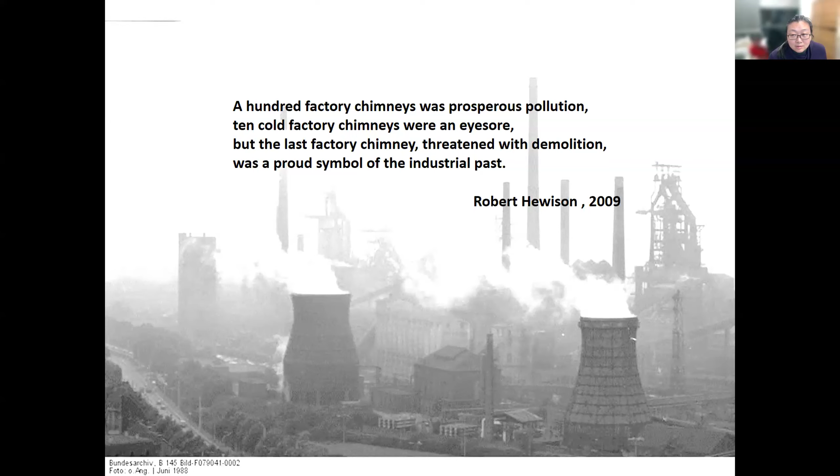And Robert Hewison, his writing gives me a lot of inspiration during my thesis writing. During my thesis, I developed a research discussion about how those unintentioned industrial remains, those not designed for long-term conservation, like monuments and architecture, came to be considered as valuable things, and through which process they were being considered as historical buildings, listed buildings in different cultural contexts.

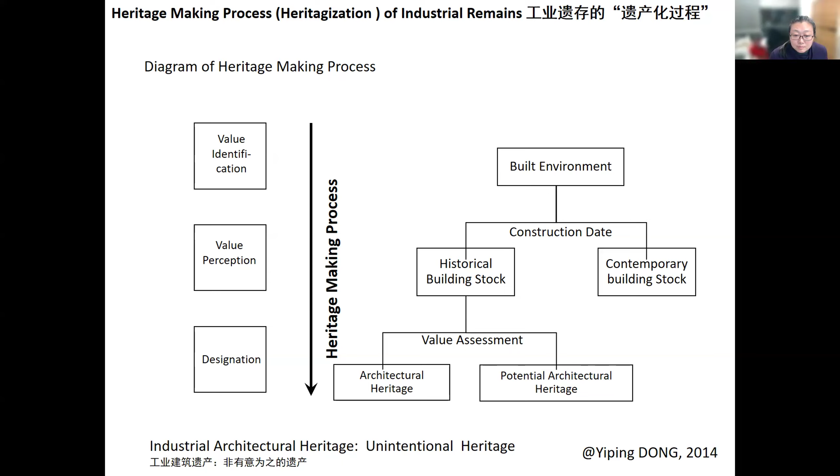So particularly the value perception is very important through a discussion by different bodies, like the architecture society and also engineer society. They all started to make more discussions about those monumental buildings from the 1950s to the contemporary. Those started one process of heritage making in historical buildings like textile mills.

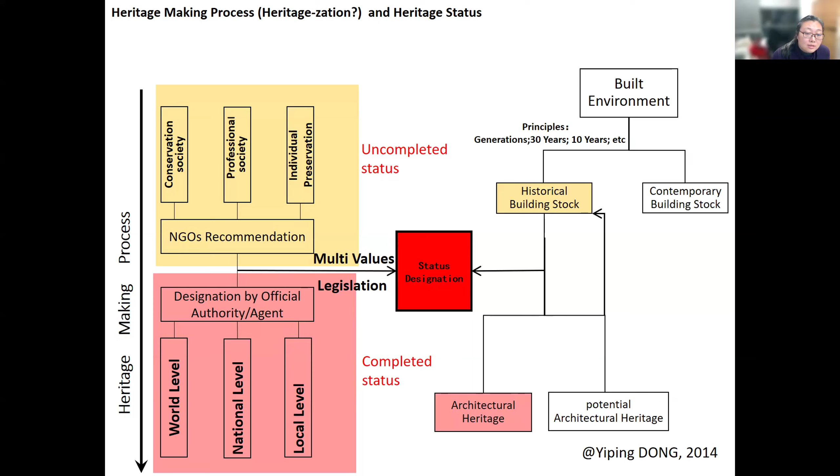So after my thesis, I started to do one particular thematic study on the textile mills, which is also inspired by a very important novel by Elizabeth Gaskell, who describes the North and South, the division and different development in the textile industry, particularly in the North cities in England. I loved this TV adaptation, and I also read the novel, and then I started to think about why the textile industry is so important in the discussion.

And then, I started to be a TICCIH member since 2004, and that also inspired a lot for my research. So I read the thematic study about different industries in the TICCIH document, like the international context for textile sites. I think today Dr. Watson is also here, so I may learn more from this part.

So I think the textile industry has had a long and impactful role for urbanization, particularly in the modern period, for architecture as well.

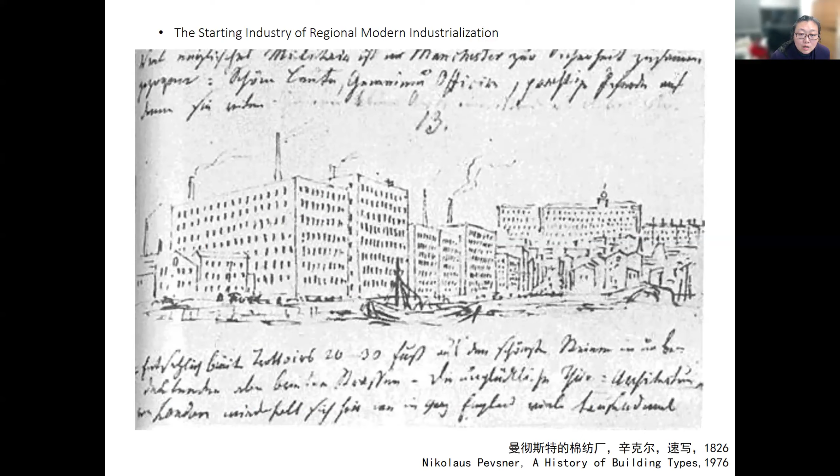Manchester is a great city with a lot of textile mills. And when I had a chance to visit Manchester in 2008, I got to visit those museums and also those big factory buildings in the Greater Manchester region, and learned about the technology development for those different architectural forms and typologies, particularly the technology development related to textile production in the British context.

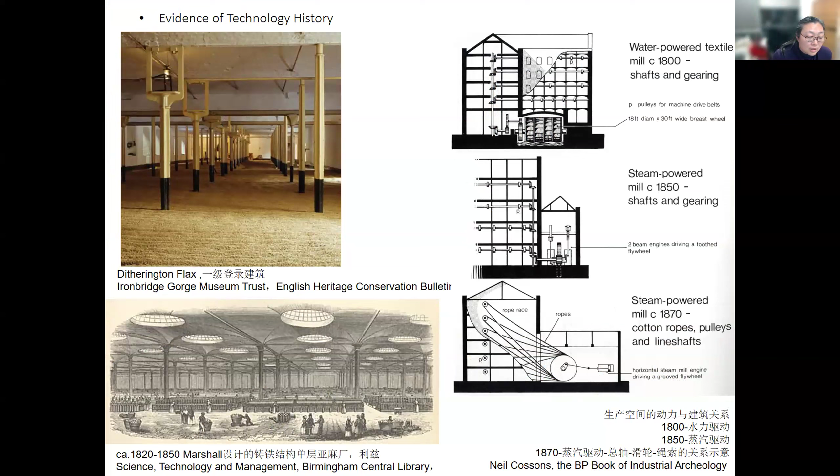And there was another discussion about industrial heritage nomination to the World Heritage Sites. We see in Japan, the first modern silk mill, Tomioka, was listed in 2009 or 2010, I cannot remember exactly. But this discussion also gives a quite interesting topic about how Western technology was introduced into the East Asia context, and how East Asian local craftswork is connected to the introduction of Western technology. This is a technology transfer discussion.

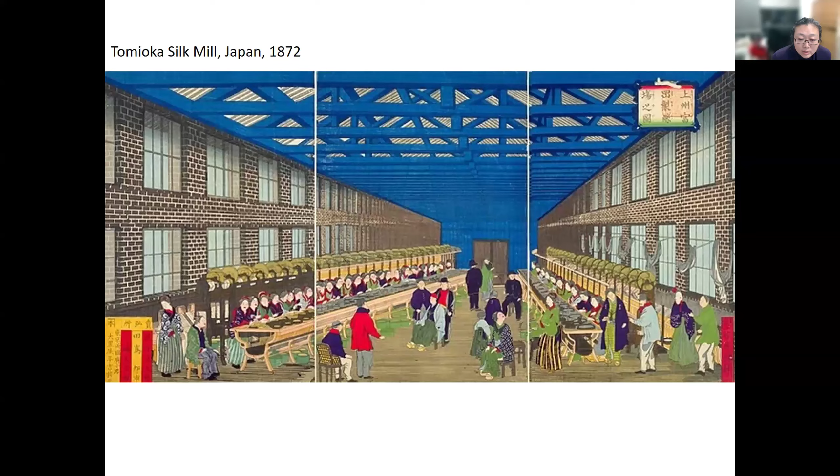So we see French engineers were invited to Japan to develop this cocoon warehouse and also the main manufacturing building in the late 19th century.

So when I came back to my working place, in Suzhou and Shanghai, this is the Yangtze Delta area, I'm thinking about why the textile history here is so long, and how this textile history from handicraft has been transformed into modern manufacturing, very similar to the UK and also similar to the Japanese practice in the past.

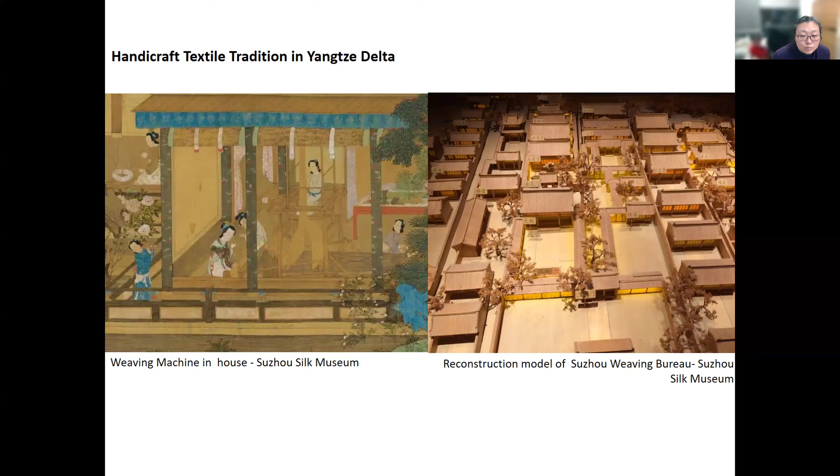However, at the beginning of the First Opium War, and later at the beginning of the 20th century, the whole area started taking up modern manufacturing for those products.

But recently, these places are under reuse, particularly of interest for the interior space, the volumes for creative industry, for office buildings. So I had a discussion of why this building should be used only for those programs. Is this adaptive reuse, or is this adaptive abuse? Are those features from the industrial past acknowledged, or are they still kind of not understood through this conservation and adaptive reuse?

So when I worked with my site in Shanghai, in the past there was a very political topic about the class struggle related to the colonial owners, the working class and the colonial owners for the factories. So the traditional discussion about this topic is class struggle discourse.

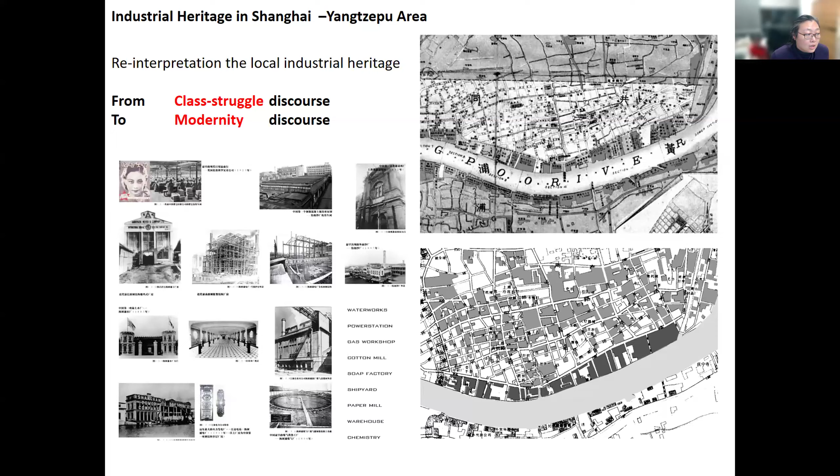So here we see more like a technology transfer, also part of this modernity discussion. So I started to look into the three major phases for the early industrialization of China, particularly in Shanghai. The Western companies first started from 1843 to 1861.

We try to look at smaller industries, almost connected to shipbuilding and textiles. Then going to the self-strengthening movement in China, that's also connected to militaries, cast irons, and textile is one essential part of this movement.

And then the Treaty of Shimonoseki, this was the period when foreign countries were allowed to build their factories in agreed port cities, the treaty cities. So if we look into the modern manufacturing of textile production...

The first case I noticed is the Ewo Silk Filature. It is owned by Jardine Matheson Company, which is still a very important global trading company. This is very early.

They started to hire a British experienced silk production expert with experience from France and Italy. It's quite a mixture, this British engineer who had working experience in France and Italy. However, when he started to build this first filature, he couldn't find proper materials to set up his working workshops.

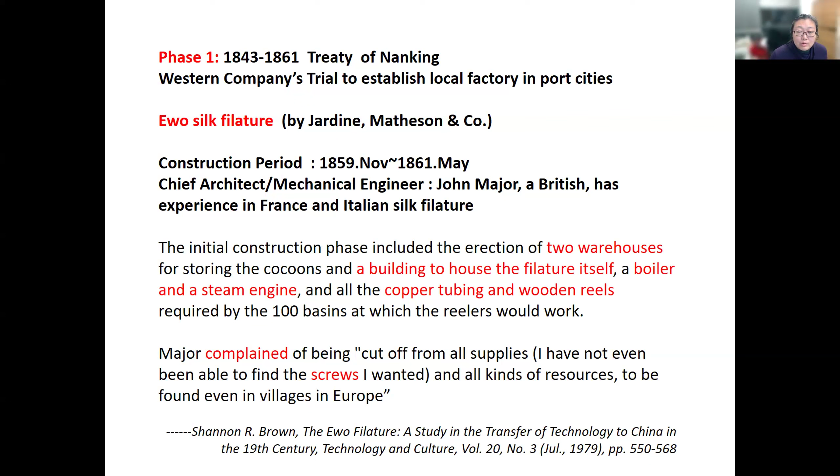So I think that is the very beginning moment - we don't have the local support yet. And this is one remaining picture about that moment.

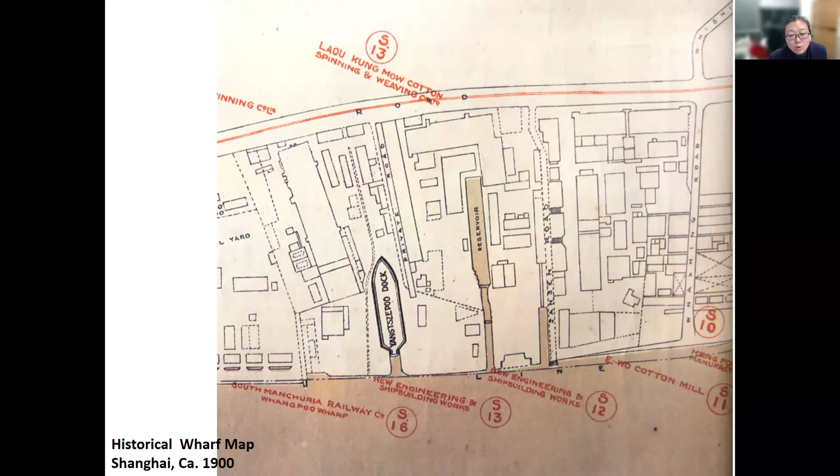After that, we can find more cotton spinning and weaving companies along the waterfront area. Here is the Ewo cotton mill, and they started to build another Ewo afterwards.

So when the local government noticed the high profit, they started to do their own investment in textiles for the cotton cloth mill. This one was made by the central government by petition, and then they started to find more experienced consulting engineers to work on the design.

This time, the mechanic engineer is an American engineer. He has experience in Lowell in the New England area. This design seems quite successful, with a modern structure at that moment and big scale, three-story buildings.

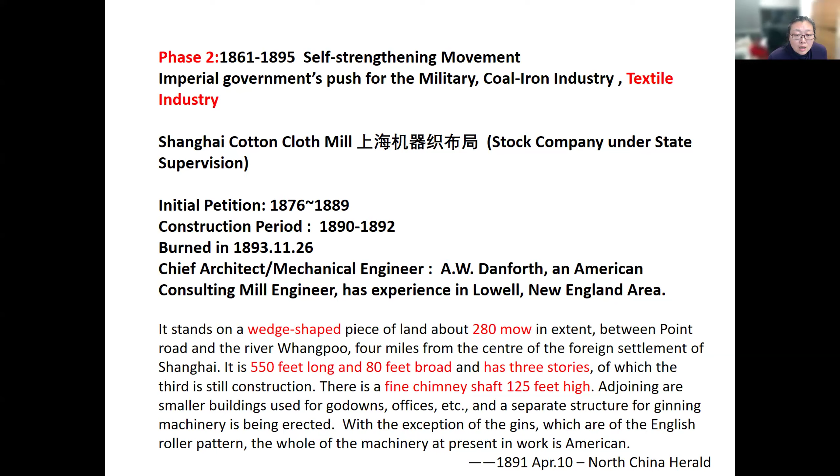So I searched for a short bio of Mr. Danforth, and he had been working in Shanghai for almost 18 years. He was approached by a very high officer and invited to Shanghai.

During his time in Shanghai, he not only helped with one textile mill, but also helped other textile mills around this place set up further expansions and new branch offices.

Through archive study, we found out the first proposal drawing for this textile mill is very local, with brush paints and drawing on traditional rice paper, and the roof feature is very similar to traditional Chinese buildings in the Jiangnan region.

But the machinery, when they needed to import those manufactured equipment, was all arranged by a company inside Manchester, and they had a very clear, regulated plan for making this machinery arrangement.

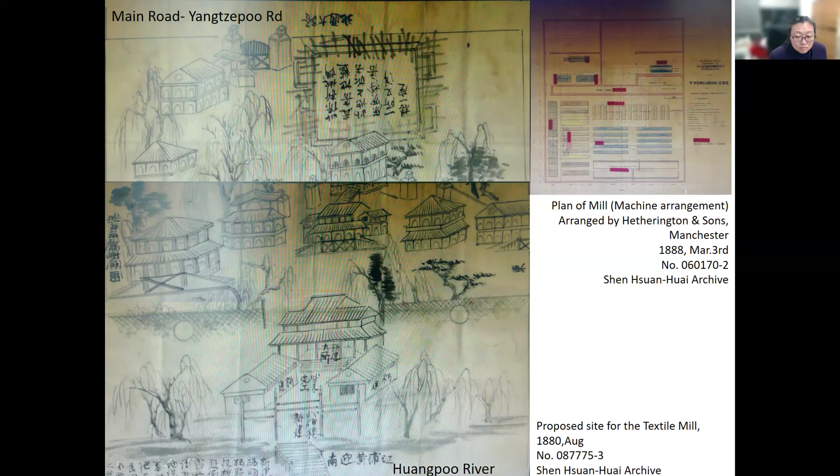So during this moment in the 1890s, this first Shanghai cotton cloth mill company was starting to run, and then a lot of public textile mills owned by the government started to grow as well.

It's a long list. And then as technology developed further, the Ewo cotton mill started to be rebuilt and redesigned by a more official architects group, Moorhead and Halse Company. They were designing more of a trendy zigzag roof structure with timber frame in Shanghai.

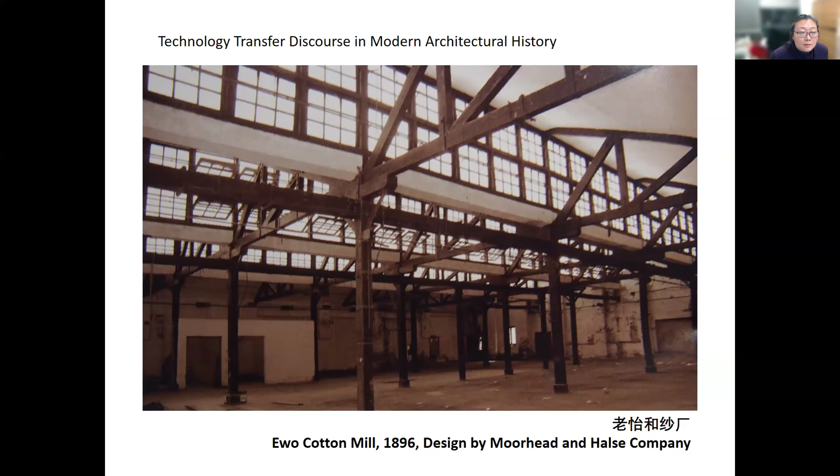This is the Ewo cotton mill in 1896, this picture was later. Then the Ewo company started to grow further, and more workshops and plants were built on the site along the Yangtzepu area.

The Shanghai case was very successful, and the investments of local companies started to go outside of Shanghai, going to areas closer to the raw materials - going to Suzhou, going to Wuxi, going to Nantong and Hangzhou. Our research also takes other cases in this region, like this one in Nantong, the Dasheng cotton mill.

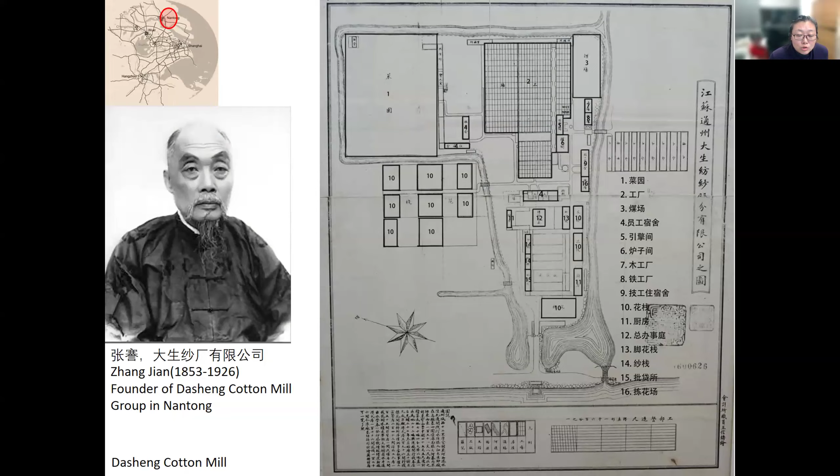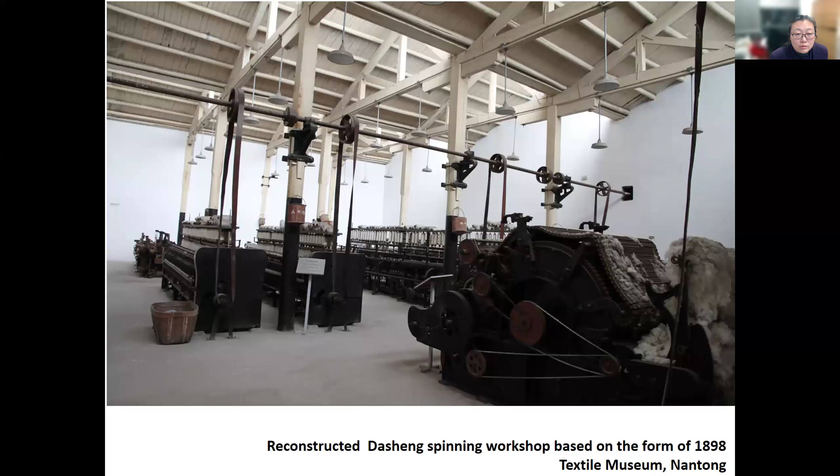This is a typical zigzag roof with the structure of the textile mill, and it's still working. There is also a museum based on the 1898 timber structure of these workshops, with some of the machines remaining from that moment. This is from our student rejoining the survey, and they still have some of the machinery manufactured at that time.

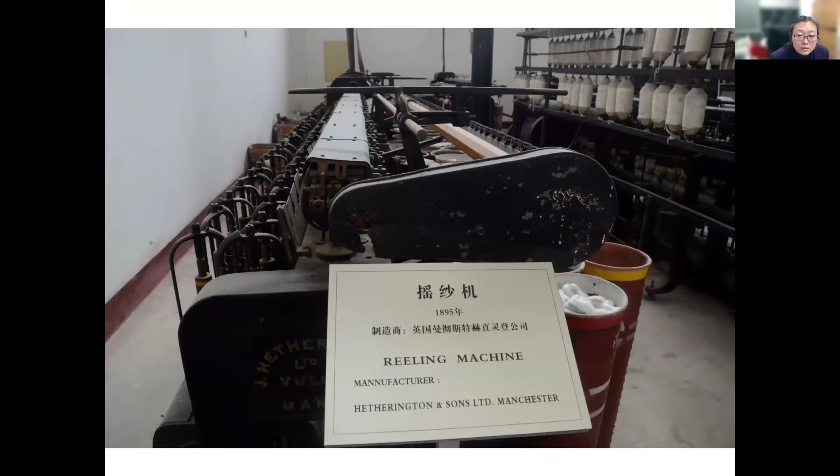This one is in Hangzhou, also along the Grand Canal, the Tongyigong, and this main structure is also made of timber and supported by timber columns.

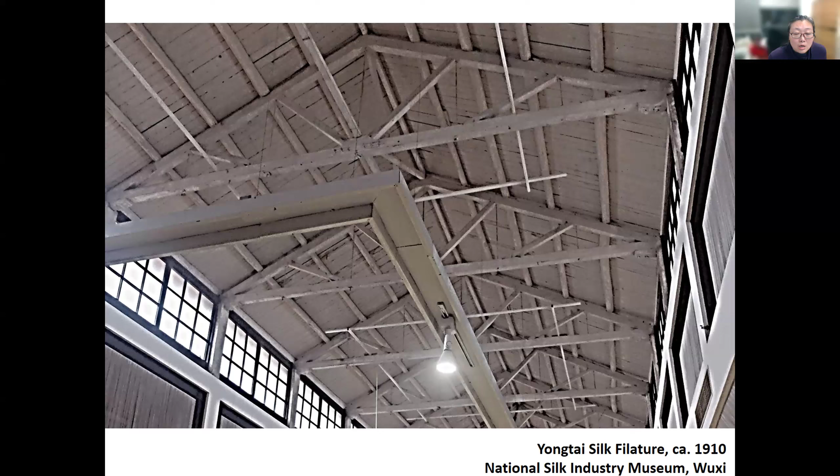And this is another silk filature in Wuxi, another two-story timber structure with brick walls. It's also very close to the canal, the big canal, which made production easy and convenient for getting raw materials in and out.

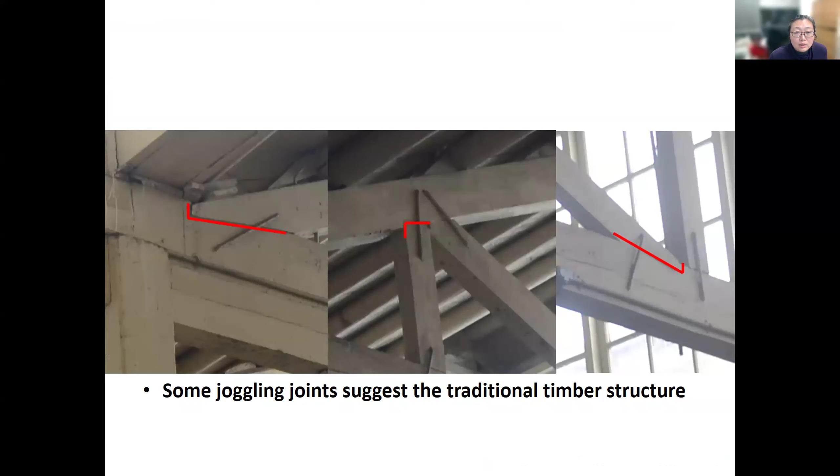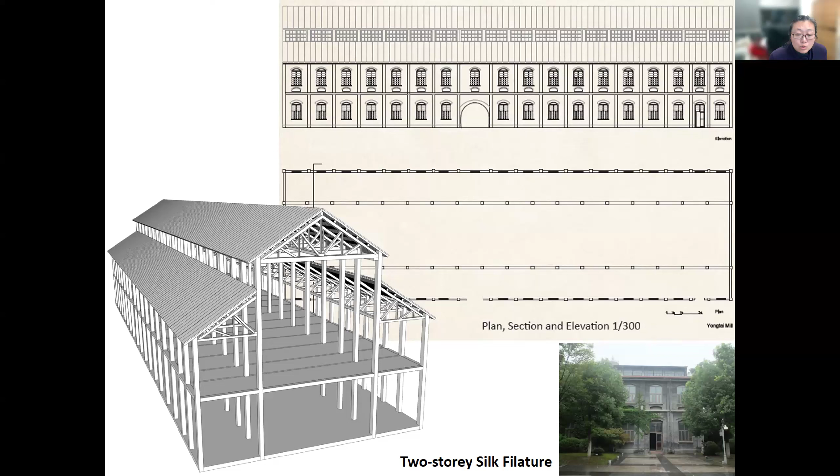If we look into the details of the timber structure, we can still see the joggling joints, showing traditional timber structure features from local craftswork, although the main architectural language has already connected to colonial styles with more decorative elements on the facade.

Here, back to Shanghai in 1922, this is the number 17 cotton mill, built by a Japanese company at the end part of the Yangshupu River. If we compare that to the similar period in the UK, from the late 1860s to around the 1920s, most of the trusses there were already cast iron.

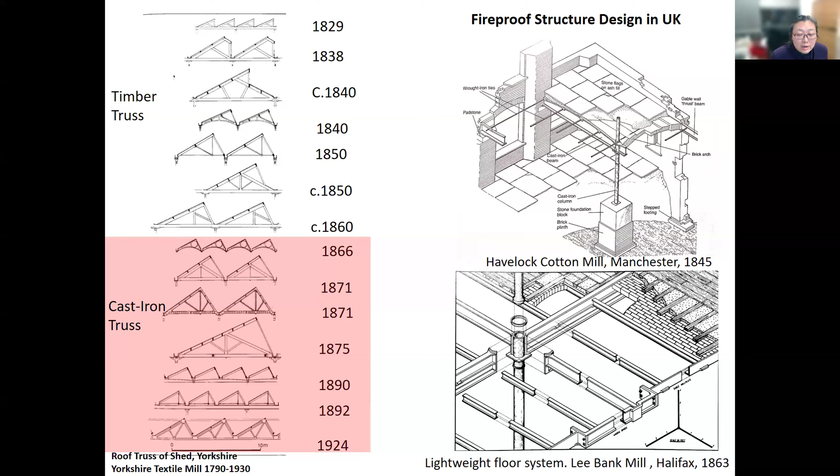However, in Shanghai or other areas of the Jiangnan region, we don't have many remains from cast iron materials for the frames. Concluding this part of the research, I found that the technicians, engineers, and contractors for those textile mills mainly designed them—not architects yet—and construction was done by local contractors, who also used piled machines and brick walls with masonry bases.

However, the fireproof issue was not very much considered in the textile mills, and timber was the major structural material. We can also see traditional craftswork remaining in the details.

This was a hypothesis I was thinking about: because of material limitations at that moment, cast iron or steel production was mainly for the military and heavy industries, which were very limited. So larger civil buildings or textile mills couldn't find good resources for these materials.

For technology transfer, we can notice that it goes from the UK to New England in America, and then to the Yangtze Delta, or sometimes directly from the UK to the Yangtze Delta region. That's how I was looking at this technology transfer discussion.

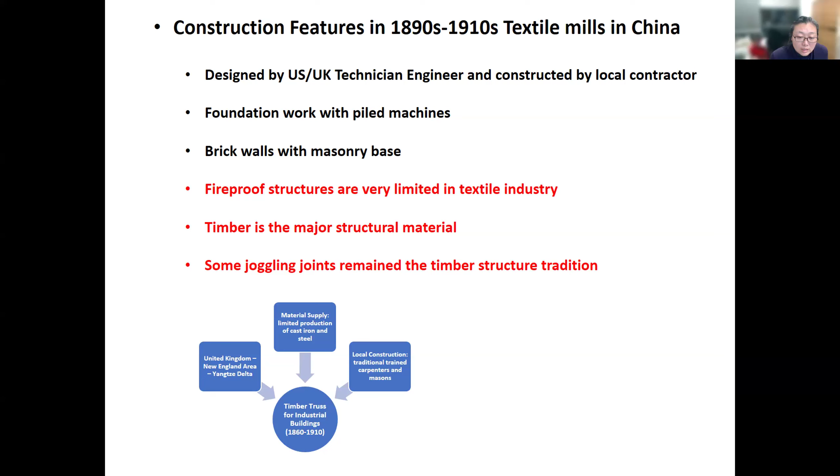However, I think this is also a very complex part of the textile heritage. It's not just about the buildings, it's about the workers as well.

In traditional writings and discussions, the class condition is very much discussed. In the case of Manchester, we learned about the condition of the working class in England, and almost 50 to 70 years later, the practice in Shanghai showed those textile mill workers were also in very poor working conditions. The Contract Labor is a documentary book discussing the poor conditions of those textile workers.

There are also classical discussions about economy, history, and urban history across different disciplines regarding textile legacies. Those workers, particularly the female textile workers, become another main topic in gender discussions within economic and urban history.

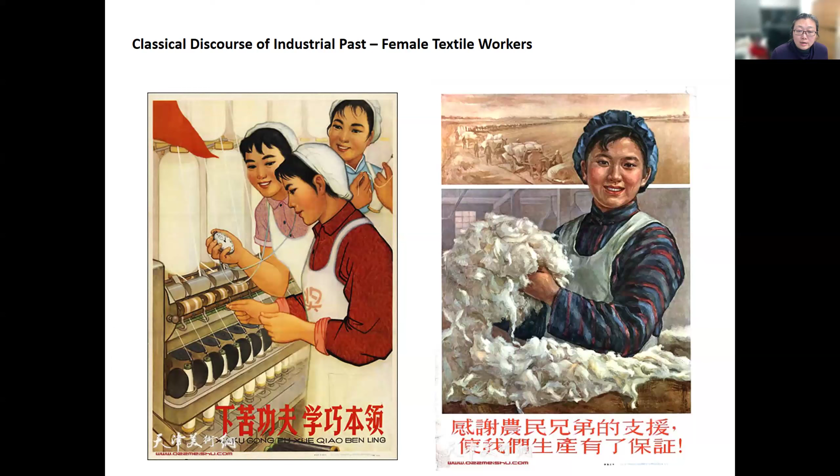After 1949, there was a significant change: the working class became the main body for the government, and the labor movement became more memorable instead of just being part of the discussion. From the 1950s onward, female textile workers became the iconic model for the working class—seen as very smart, very diligent, and productive.

Those films and documentaries built up a new image of Chinese workers, particularly at this number 17 textile mill. The workers, because they were well paid and had a secure position for a long time, expressed a very happy life from then until the 1990s.

However, in the urban regeneration process of Shanghai, there was a particular sacrifice about the textile industry—it was considered no longer suitable for this booming metropolitan Shanghai, due to its pollution and labor intensity. I think this is similar to other contexts as well.

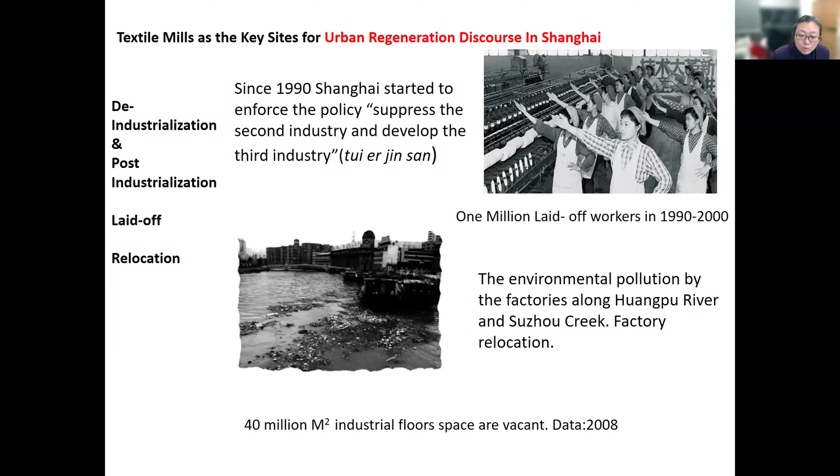At this moment, Shanghai started to have a lot of empty industrial sites, particularly textile sites. They started spontaneous reuse, mostly just looking at the space, so most of the textile machines were not kept.

They were purchased by other remote places for developing new textile mills, going to somewhere like Jiangsu, or even going to Xinjiang for textile production.

Then there was another shift from an industrial waterfront to a livable waterfront. A lot of effort was made to turn those textile or other industrial buildings into leisure places for recreation and entertainment spaces.

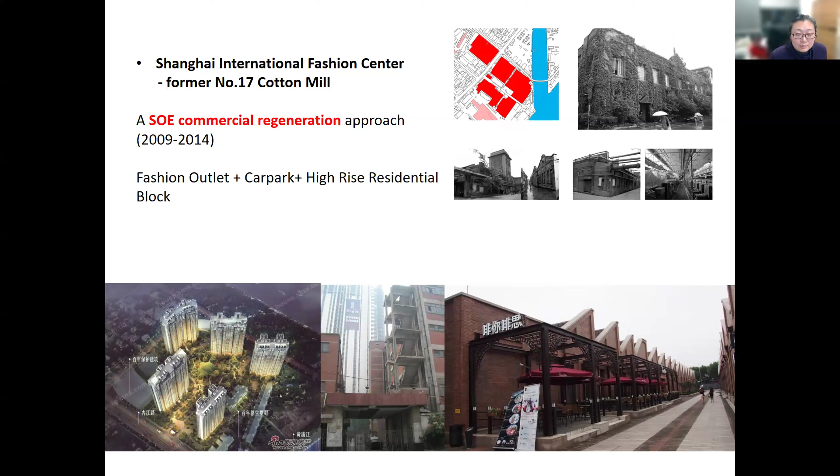Here is the continuation of the case of the number 17 cotton mill: it became a fashion outlet, became a car park, and the building that used to be the residential part for workers was taken down and became a high-rise residential block. The interior spaces of the original working spaces became high-end fashion design spaces.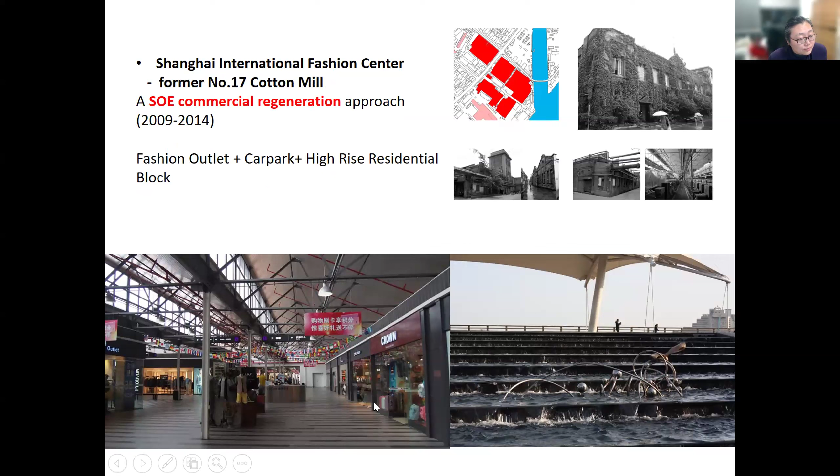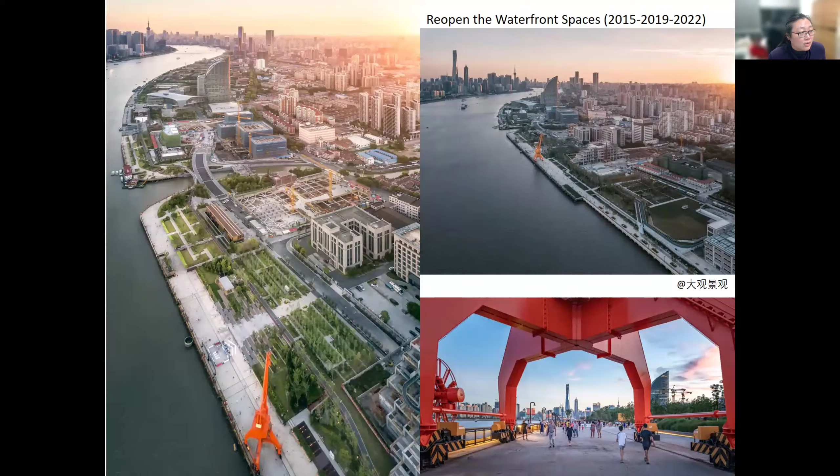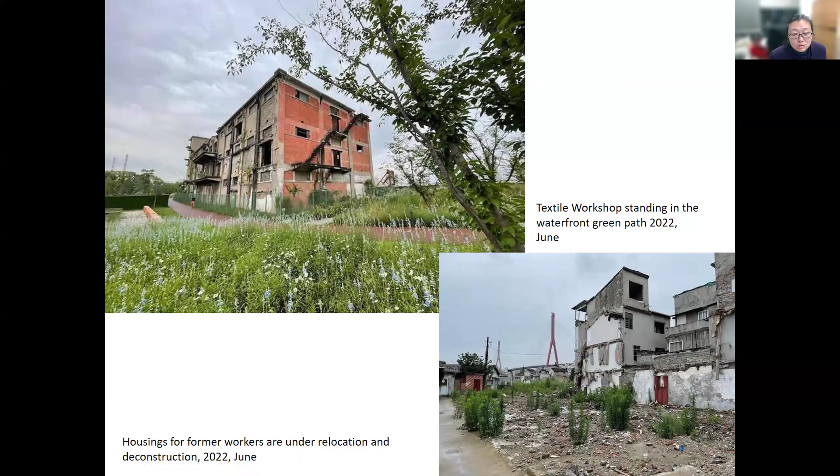However, some parts not very close to the waterfront, like this textile workshop, are still standing unused because they don't find a proper reuse program for the space. And the housing for the former workers isn't really considered a valuable part of the industrial heritage - they only consider the manufacturing part important.

The recent work on this area is the former EWO textile mill restoration project, 2021 to 2024. This was again a very large textile mill, state-owned, a good company for workers. However, during the last regeneration and relocation process, they began to stand empty for many years, and when empty, it became the expansion of the waterworks next to it.

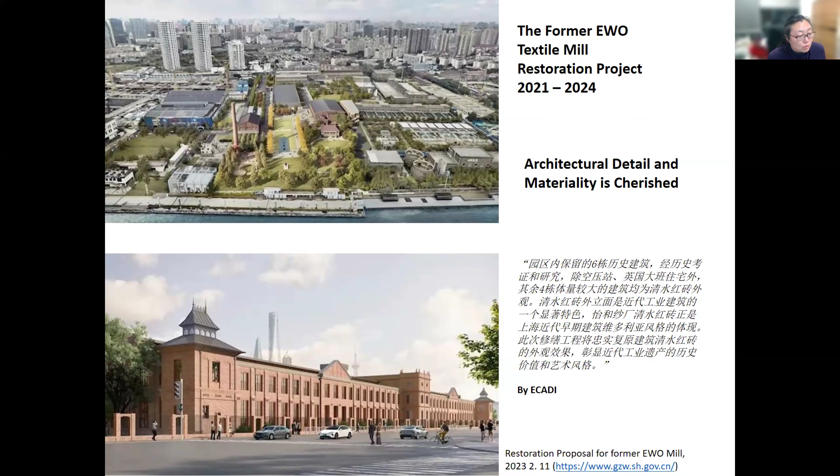So the recent restoration focused on cleaning the facade to make the red brick serve clearly as an icon for the history, and then refurbishing all those layers of time back to the so-called old version from the EWO period. So this is how it looks right now.

Last week I went there, but it's still not open to the public. This is the facade after restoration. As it's now part of the waterworks, they still close the place off - it's still a forbidden area.

And for this interior space, according to ECADI, the Design Institute, what they did was restore the timber structure for the roofs. From this, I feel a little conflicted - all those traces of the technology details may not be revealed through this restoration. So this is one part of the space and the material part.

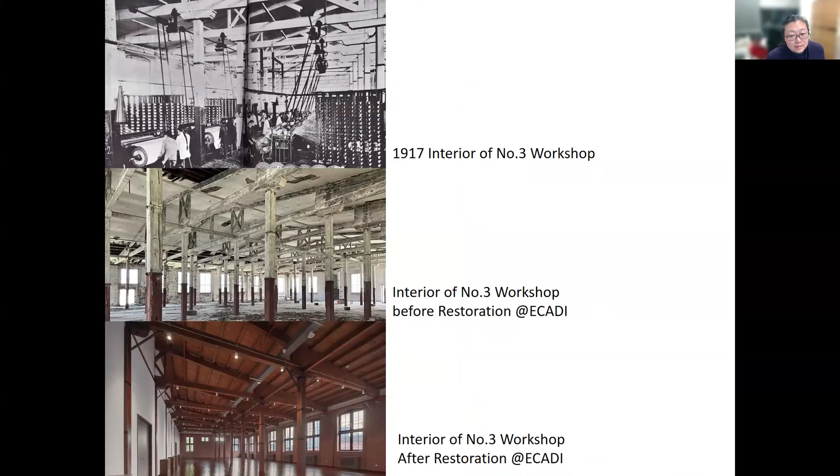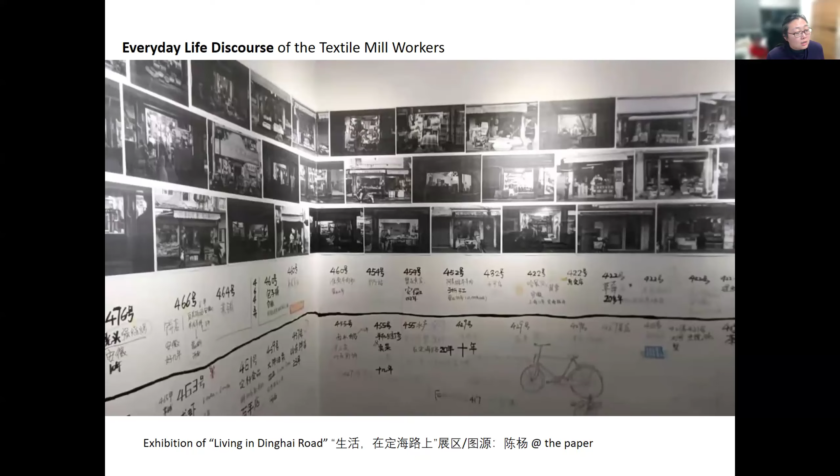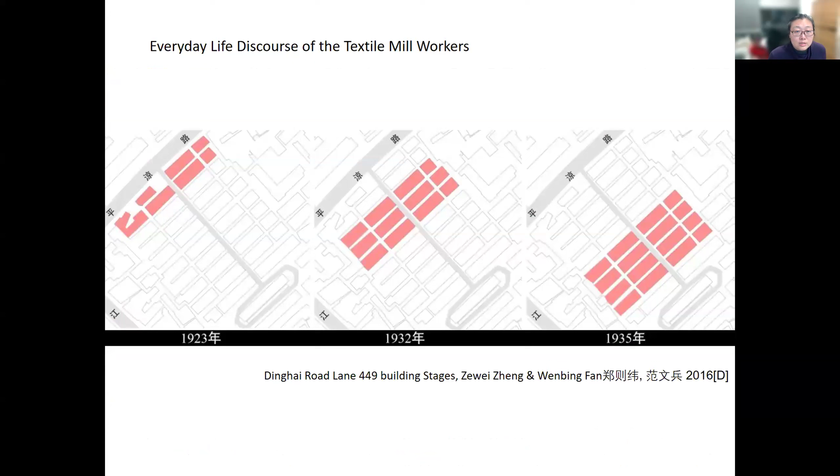However, another discussion that has arisen recently about this heritage is the everyday life of the textile mill workers, how they engaged with urban activities, and the relation between those living compounds and the manufacturing part. A series of scholars studied this former dormitory housing area for the cotton mill, starting to document and understand how families grew through time and how this textile mill impacted their everyday life.

And also interestingly, through this survey of the textile workers' housing, a very important class discussion about the prototype unit for the factory laborer has now been rediscovered. This was in very poor condition, and this condition is hard to regenerate.

So it's still under the regeneration plan, but actually this part is very tricky to regenerate. Are we going to make it a high-end apartment again, or should it remain part of the memory?

So in the end, I've been talking about the industrial heritage discourses, mainly the technology history discourse, which in recent years is becoming a richer narrative of different industrial pasts. Okay, so that's my part of the presentation, and I hope we'll have more questions after the other speakers.

Thank you very much indeed, Professor Dom. A really comprehensive presentation of the textile industry and its heritage, touching on so many different aspects. I'm sure there will be plenty of questions later.

I love the idea, by the way, of adaptive abuse - it's a very, very clever one. So thanks, and we move to our next presentation, which is

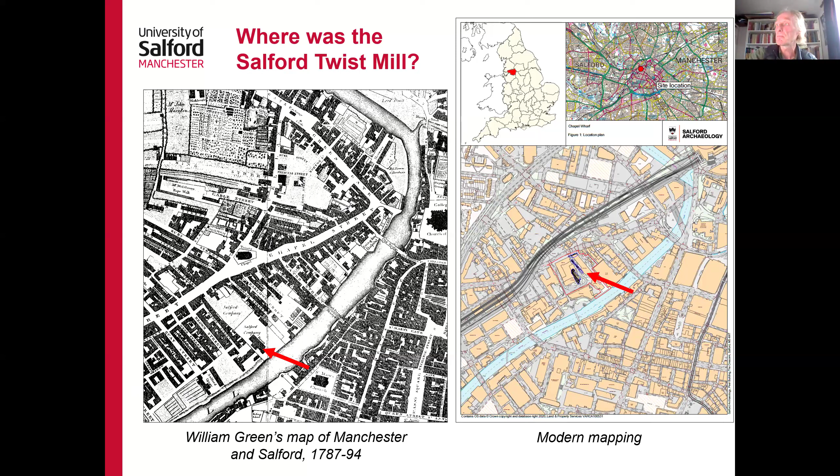The image on the left is an extract from a late 18th century plan of Salford, produced by William Green between 1787 and 1794. You can see, marked by the arrow, the footprint of the Salford Twist Mill, or at least the first components of that mill complex. This initial part of the mill was erected in 1790 to 92 as a purpose-built factory for the preparation and spinning of cotton yarn. It was set up by a company called the Salford Engine Twist Company.

It is known to have been of 6 stories including the basement, with internal dimensions of just over 111 feet, or nearly 34 metres, by 35 feet wide, or just over 10 metres. It was a brick construction, as nearly all mills in the Manchester manufacturing district are, with timber beams, which conforms to the typical design of a late 18th century Arkwright type mill.

It has been suggested that the mill was water-powered initially, but the supporting evidence for this is very scant, whilst records in the Boulton and Watt collection in Birmingham show that a 30 horsepower double-acting steam engine with sun and planet gearing was installed in 1791. This was actually the first engine built by the leading engineering firm of Boulton and Watt to be set up in Salford, and it was probably the first steam engine to be installed in a cotton mill in Salford.

The partners of the company were John and George Phillips, Charles Wood, and Peter Atherton. The Phillips family had established themselves as Manchester's leading exporters of textile goods such as fustians, checks, muslins, calicos, and were considerably wealthy, whilst Charles Wood was similarly a prominent local merchant and manufacturer of checks. Peter Atherton, however, contributed different experience to the partnership, having gained renown as one of the most successful textile machine makers of the later 18th century.

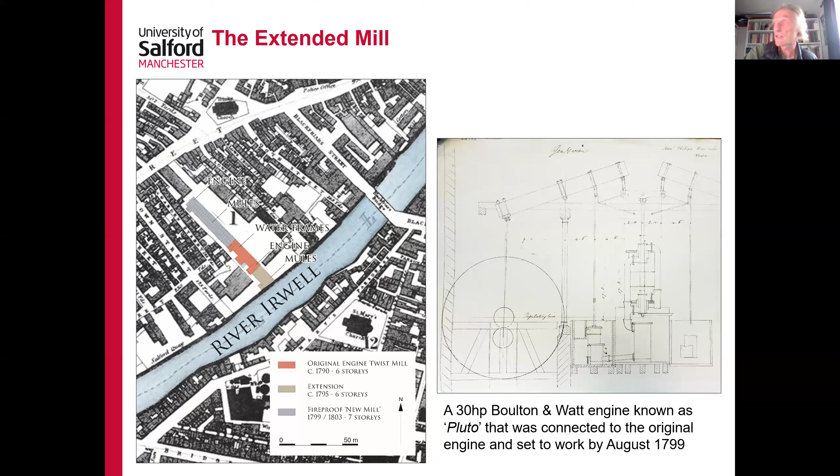The extension had increased the internal width to 45 feet, or over 13 metres, which reflects its internal use for mule spinning, the favoured machine in the Manchester manufacturing district for spinning cotton. This mill was powered by a 30 horsepower engine, again supplied by Boulton and Watt, which was ingeniously set alongside and connected to the original engine. George Lee nicknamed it Pluto, with an original design drawing shown here on the right.

By the time the engine was set to work in August 1799, George Lee had turned his attention to erecting the third mill, the one that really is the focus of the excavation and this talk, because it was a revolutionary design. The foundations for this new mill were laid and the walls completed up to the first level of the first tier of beams in 1799.

It was to be of 7 stories, including a basement, each story forming a room over 200 feet long, or 63 metres, by 42 feet wide, with an engine room across the northwestern end, creating what was essentially one of the largest cotton mills in the Manchester district at that time.

However, there was actually a hiatus in building work at the first level of the beams, which has been a point of discussion with some authorities, suggesting that it was during the following few months that George Lee decided to have an iron frame fitted to the mill rather than traditional timber construction.

It was during these months that he very rapidly refined his design plans, having spent time in the mills of Charles Bage in Ditherington and John Marshall in Leeds, who were also working on developing cast iron frames for textile mills. Ditherington Mill, of course, is now recognised as being the world's first iron frame building.

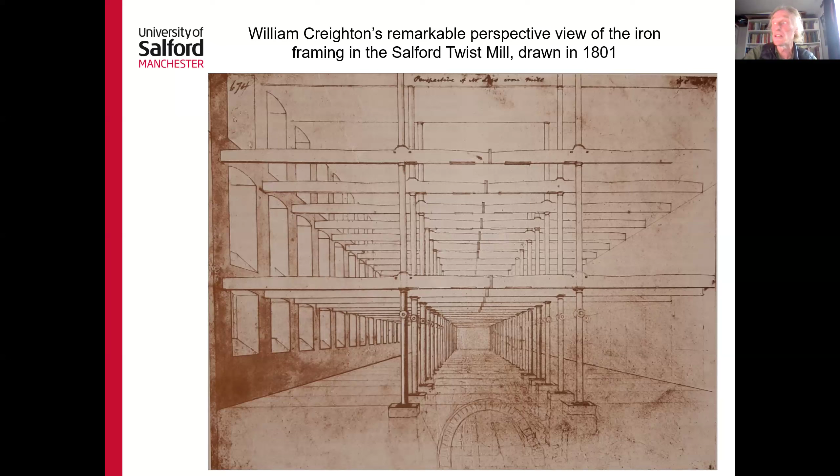Creighton's drawing here also shows that the iron beams were supported by cylindrical columns, which were structurally more efficient than the slender cruciform cross-section type that they superseded. The Salford Twist mill was almost certainly the first textile mill to have employed such columns. The drawing also shows that the bottom row of columns were fitted with flanges two-thirds of the way up, presumably to allow steam into the column sections for heating the mill, which again was another first—steam heating in mills.

After several changes of plan, a 100 horsepower engine was ordered from Boulton and Watt to power the mill. This was the largest engine for a textile mill recorded in the Boulton and Watt collection until well into the 1820s. The mill was completed by the end of 1801, and the machinery was mostly in place by April 1802. By that date, the Salford Engine Twist Company had been rebranded as Phillips, Wood and Lee, with a further change a couple of years later to the well-known brand of just Phillips and Lee.

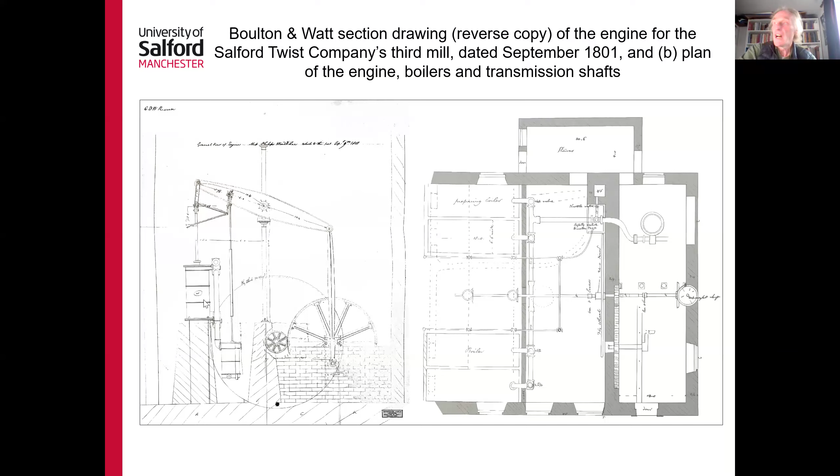But the later history of the building has been a matter of some dispute. Some authors believe that the mill building survived until the Second World War, when it was destroyed by aerial bombing in December 1940. But it has been suggested that the iron frame mill may have been dismantled long before that date, and that the structure destroyed in 1940 was a later building.

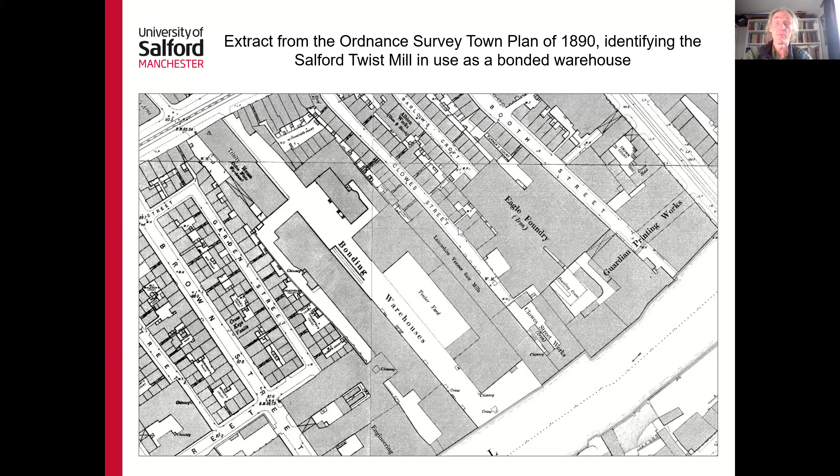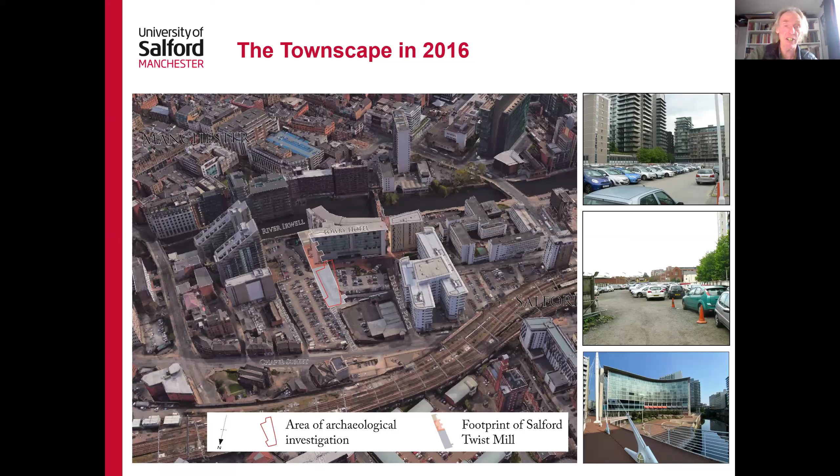There was nothing on the site at that time to mark the site of the mill, this area being dominated by car parks and the Lowry Hotel, as you can see in this selection of images. As is typical in Greater Manchester, large developments such as this, where there's archaeological interest, were preceded by an archaeological excavation, and this aimed to uncover the available footprints of the 1801 mill.

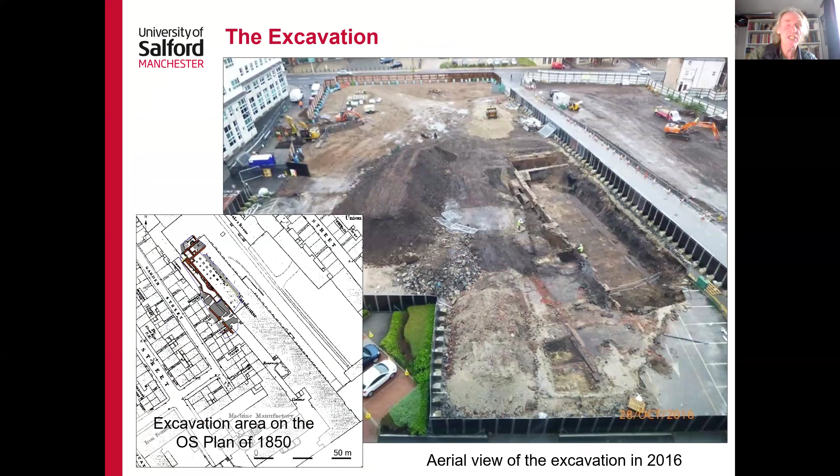The extent of the excavation area is marked on this extract here from a map of 1850. So as you can see, we effectively got just less than half of the northern part of the mill.

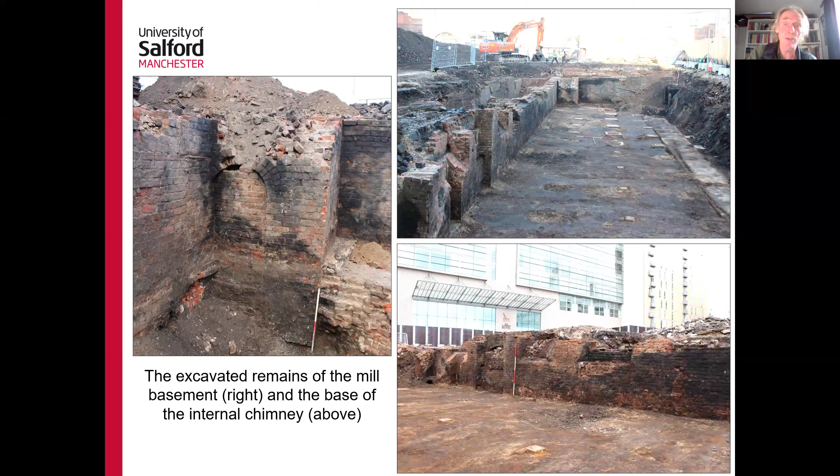This had been bricked up by the mid-19th century and a new flue inserted through the southwestern wall of the mill as a result of remodelling and a new power system that was introduced when the mill was converted to a bonded warehouse.

The excavation uncovered 4 parallel rows of bases along the basement, each regularly spaced at about 9-foot intervals. These had evidently been laid in at least 2 separate phases of development, with 2 of the rows representing foundation pads for original cast iron columns. These had formed 23 transverse bays and 3 longitudinal aisles, each bay with a span of 4.2 metres.

Quite remarkably, during the excavation, the lower parts of 3 columns remained in situ along the eastern edge of the excavation area, the upper parts having been sheared off just below the flange pipe joint shown on Creighton's drawing. The survival of these columns, amongst other evidence, clearly demonstrated that the iron frame mill had indeed survived until 1940, and hadn't been dismantled as suggested by some authors previously.

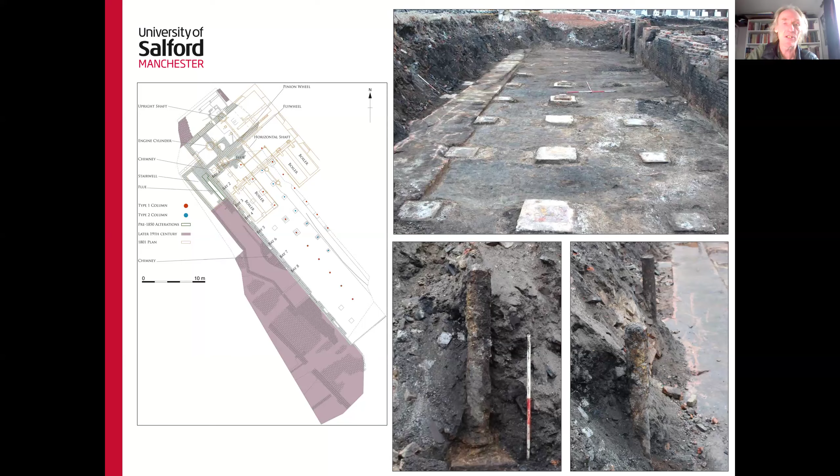Each of these foundation pads essentially comprised a rectangular stone block with a square cast iron base set on top, featuring a shallow cup designed to receive the foot of an unusual type of cast iron column.

This cylindrical column type featured a closed hemispherical foot. Comparable examples have been identified, the first in the basement structure of Albion Mill in Manchester, built in 1802, the design of which the esteemed Ron Fitzgerald attributed to a misguided attempt to compensate for movement. That might well have been the case, but further examples with a rounded foot were excavated.

Very recently during the excavation of the Jersey Street Mill in Manchester, which dated to 1824, these particular examples had a wide collar to the foot, offering a slight improvement to those in the Salford Mill, but they do nevertheless demonstrate the longevity of this basic design.

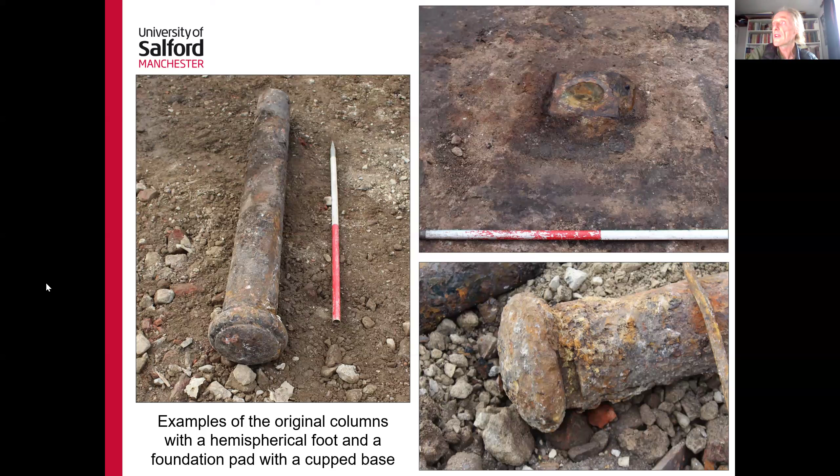Fragments of several beams derived from the original cast iron frame were also recovered from the excavation, and whilst none of these were complete, there was sufficient evidence to show how the beams had probably joined together and interlocked with the columns.

All of the beam fragments found during this excavation displayed an inverted T-section profile with a flange along the bottom edge to support the brick vaulting springing from each side.

The design of these beams displayed a very close resemblance to those used in the Ditherington Flax Mill a couple of years previously, although a key modification was the addition of small lips to provide a proper seating for the brick arches. This represents the genesis of the inverted T-shaped flange beam that became so ubiquitous through the 19th century in iron frame buildings.

Several fragments of the excavated beams contained a pair of rectangular holes, which you can see quite clearly on some of these images. These were intended to house longitudinal wrought iron tie rods to counteract any displacement generated from the thrust of the floor arches.

Another beam fragment had a projecting bolting eye, again seen clearly here, which was cast to the end of the beam, and this was almost certainly intended to receive a spigot on the head plate of the underlying column, allowing the columns to actually interconnect, which we tried to reproduce on that drawing on the right.

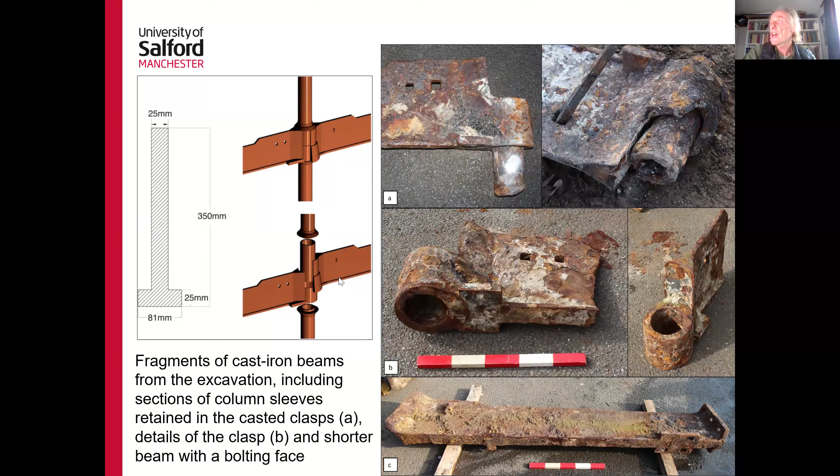So, really to conclude, being conscious of time, this excavation and the associated research of the Salford Twist Mill, I really feel has thrown quite a bit of interesting new light on the development and physical structure of what can only be seen as one of the most significant historic cotton mills in the Manchester manufacturing district.

The documentary evidence points to George Lee having been largely responsible and instrumental to the design of a cast iron frame for the Salford Mill, rather than it having been the work of Boulton and Watt, as has been stated by some authors, including the eminent engineer William Fairbairn in 1854.

Lee will undoubtedly have drawn on the earlier work of people like Strutt in Belper, Bage in Shrewsbury, and Marshall in Leeds, and will have benefited from the advice offered by Boulton and Watt, which would nevertheless be credited with making a significant contribution to the successful application of cast iron in the construction of multi-storey buildings.

On a final note, I think it's also important to note that the work has demonstrated the research value of excavating the sites of early steam-powered mills archaeologically and using the physical evidence from those excavations to interrogate the documentary record for the development of individual sites, and to test the wider understanding of how the design of multi-storey mills evolved. And with that, I would like to hand on, or hand back.

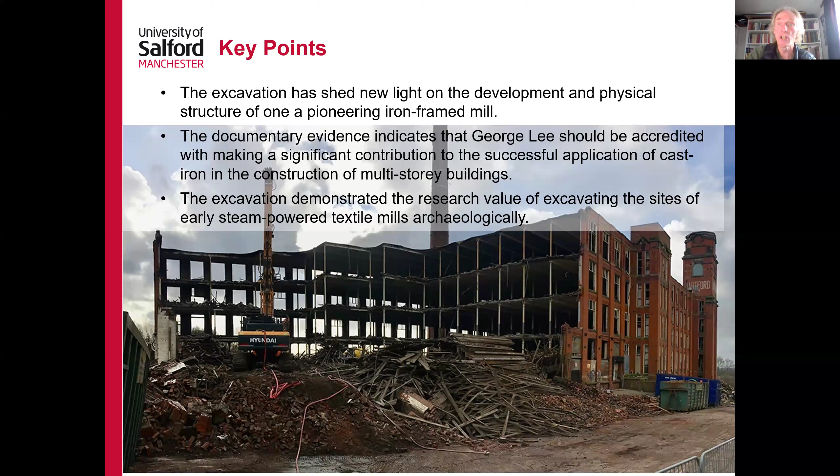Okay, thank you. Thank you very much, Ian. Very informative presentation. I was particularly interested in this presentation because it can show, you actually show pretty well what archaeology can contribute to our knowledge of the industrial past, in this case of this particular site.

Because, well, this is something that is pretty well known in the UK and also in the USA. We have today some colleagues from the Society for Industrial Archeology as well. But in the East, it's not so common that archaeology studies modern sites. And so the idea of industrial archaeology as the proper archaeological analysis of the material evidence of the industrial period is not so common in the East as well, at least when compared to the West.

So this was a very good example indeed of what archaeology can tell us about the industrial past. So thank you very much.

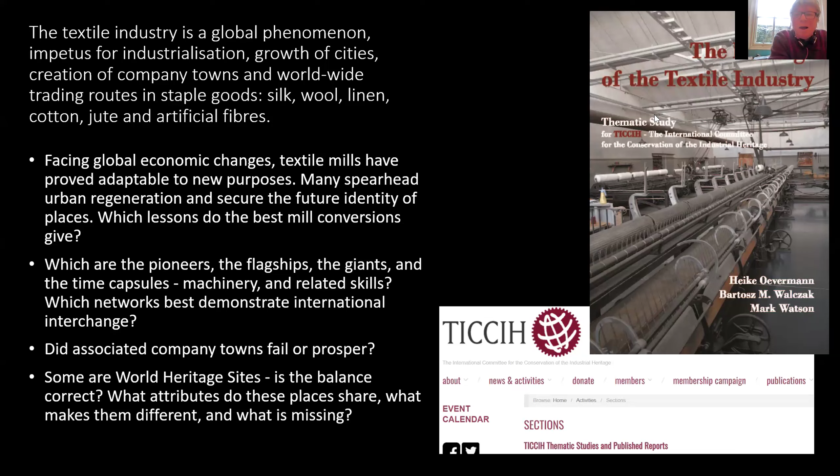And a very small number are World Heritage sites. Is the balance correct? Are some parts of the world capable of contributing sites to that World Heritage list, which we need to consider more rather than just take the Eurocentric view that we may have, or some of us have - I do, certainly. So these are the three authors that came together to create a publication derived from the list of sites which had been put online for almost 20 years.

And there were two professors among them, Heike Oevermann on the left and Bartosz Walczak on the right, professors of architecture, both of them. Heike was particularly interested in urbanism and the place of the textile mill in the city. And that's the subject of a book of hers, which came out almost simultaneously with the textile book produced by TICCIH.

Professor Walczak, on the right, I owe a lot to him for having taken out the sites under the headings I've just described and put them into countries, so they're much more easy to look up, and geo-referencing them by longitude and latitude, and also because of his knowledge of Russian, his ability to insert into that list quite a lot more sites that were significant in the Soviet Union and the countries in that sphere of influence.

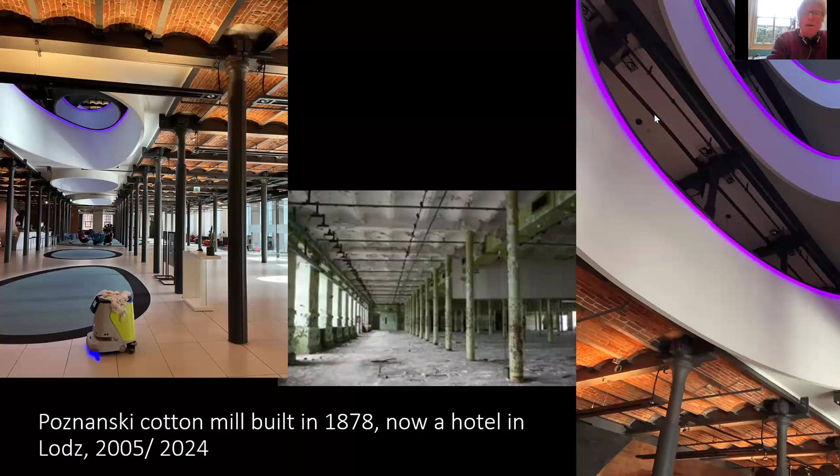And very recently I was in Poland, so that was Bartosz in front of the Scheibler mill at Księży Młyn, on the south side of the city of Łódź, and on the north side is the Poznański cotton mill, which is now a hotel. It's really a startling transformation, with these egg-shaped holes cut through the building to bring light into the middle. I think that's a solution that needs to be applied to quite a lot of the bigger cotton mills that we are left with today.

And that's now a very smart hotel, and there's a small robot that trundles around like Wall-E, tidying up after people. So it's quite surreal to have come into that in the Manufaktura complex, where all of this was the Israel Poznański complex, which was the second biggest in Łódź. And now it's attracting millions of visitors to the fun fair, the multiplex cinema, the small museum, the restaurants, and the car parking on top of the weaving shed.

So the tower you see here, I'm not sure if you can see my arrow, is this tower here at the back of Manufaktura. And this is the view from the swimming pool, which is installed in a wrought iron cistern on the top floor of a cotton mill that was built in 1878, iron-framed.

And I also very much appreciate the way that French architects and developers have tackled the big cotton mills. There, quite a robust approach is taken. It's okay to knock holes where appropriate into these buildings, to bridge over spaces between them, and to change the roofs, add things to the roofs in a contrasting way. All of these are quite exciting things that you can do with textile mills, but probably not if they're World Heritage Sites, because UNESCO is far, far behind the way of thinking of most conservators.

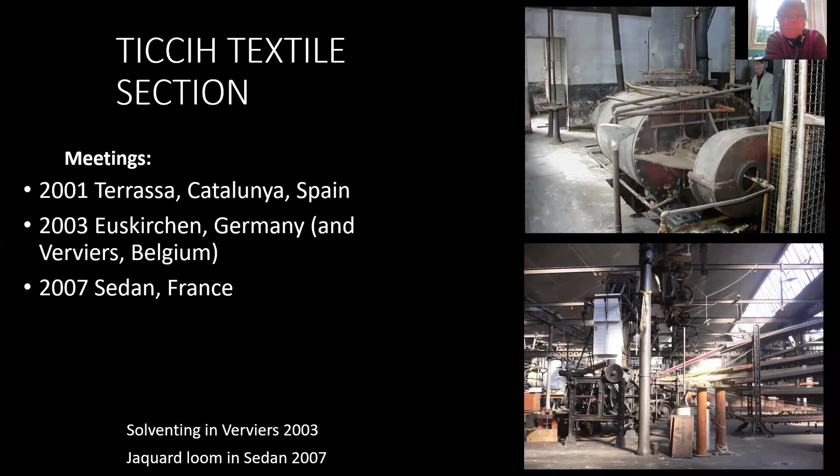So we adopted these headings: pioneer, flagship, giant, international exchange, time capsule, urbanism, and landscape, which covers things quite well, I think, and doesn't go down the route of saying which is the best cotton mill or the best silk mill, because that might not mean as much in terms of outstanding universal value.

And then what about the silk mills? Well, there are some in Italy which are way older than these.

And then the flagships — those are the big impressive mills, with big chimneys and quite a lot of decoration. So Templeton's in Glasgow is perhaps one of them, though there's no intention to make that a World Heritage Site, or Lister's in Bradford, or Cox's Stack in Dundee, nor Poznański.

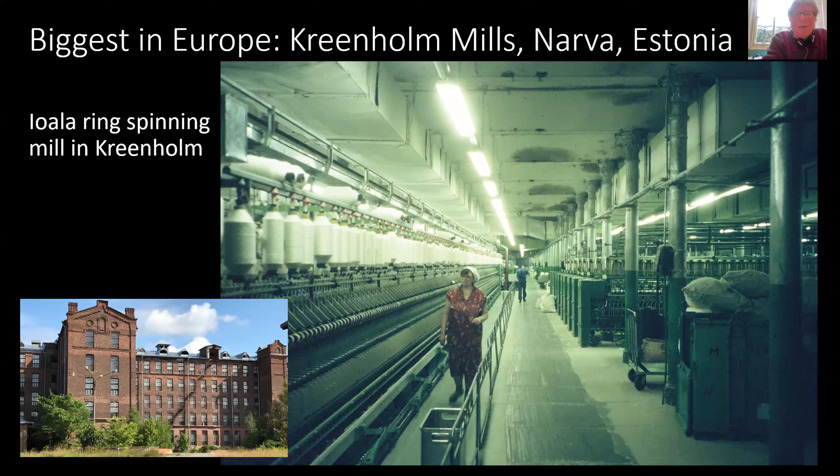And biggest in Europe is Kreenholm Mills in Narva, on the very edge of Estonia. This is the Ioala ring spinning mill, named after a popular singer of the interwar period, and this is ring spinning going on in that iron-framed mill. These mills closed in 2008.

So we're looking from a tower within the mill complex at Crow's Island, which had waterfalls on either side of it. Russia is on the left, where there's the Stieglitz flax mills, which were managed by Scots and in fact built by Fairbairn. On the right, there are more of the spinning and weaving factories that are part of the Kreenholm complex, along with a hospital and assorted housing, making this a company town as well, pretty much.

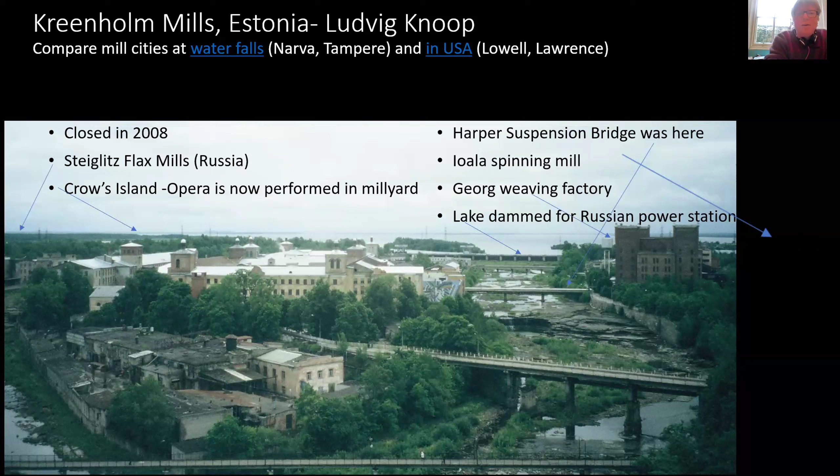So other giants - you'd have to pick the time period. The biggest complexes around 1800 were Belper in England and New Lanark in Scotland. By about 1900, one of the biggest cotton mills was the Scheibler complex of Księży Młyn in Łódź, Poland, because it was just inside the borders and tariffs of the Russian Empire, giving them the whole Russian market to focus on, as did Kreenholm and Tampere.

And if you look at the biggest of the woolen mills, maybe Dean Clough in Halifax, which made carpets and has been spectacularly reused in the United Kingdom, should be considered.

For international interchange, which I equate to criterion 2 of the World Heritage cultural criteria - an interchange of human values over a span of time within a cultural area on developments in architecture and so on. There was a very specific link in the export of technology, which was illegal at the time, from the United Kingdom to USA.

So it went from Belper in Derbyshire, which is now a World Heritage Site, to Pawtucket in the USA, which is not, but which is one that Pat Malone, who joined us very early this morning, knows extremely well. So that's a good example of two sites connected across continents.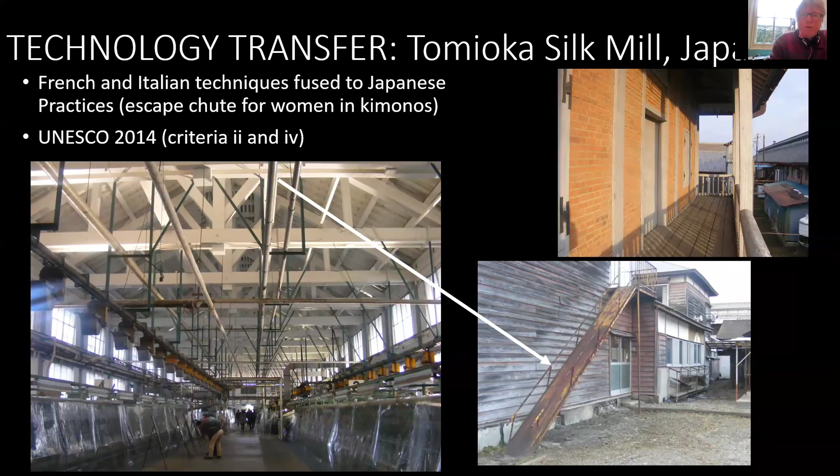It was a fusion of Japanese practices in the timber frame, which is good to resist earthquakes, and the use of brick infill between that, perhaps a French influence, as well as the machinery that is there. That World Heritage Site is a serial nomination or inscription, which includes some of the places where silkworms were cultivated.

In terms of living traditions, or so-called intangible heritage - this is very tangible. This is a fulling mill in which the kinetic power of the water is being employed. And you see these across the Balkans and Southeast Europe.

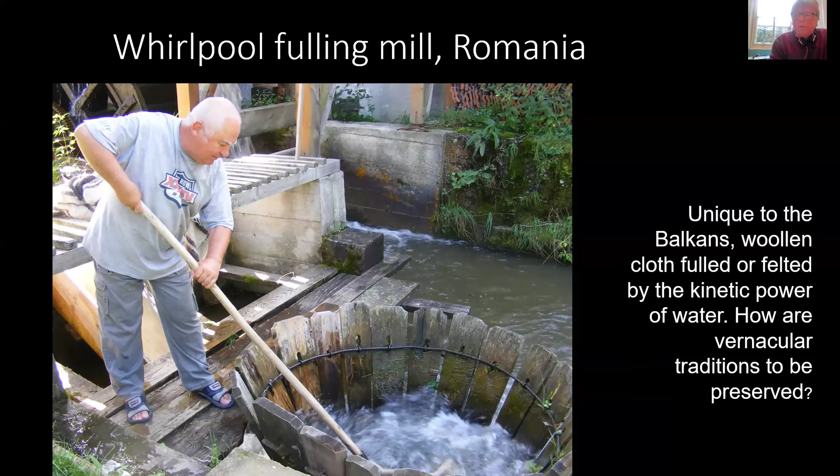So how is technology like this being preserved? I think it's through continued use, hopefully. And then we have the time capsules - machinery that was installed a long time ago in that place. An example would be the Göteborgs Remfabrik, producing heavy-duty cotton cloth in Sweden, and continued tapestry weaving in France.

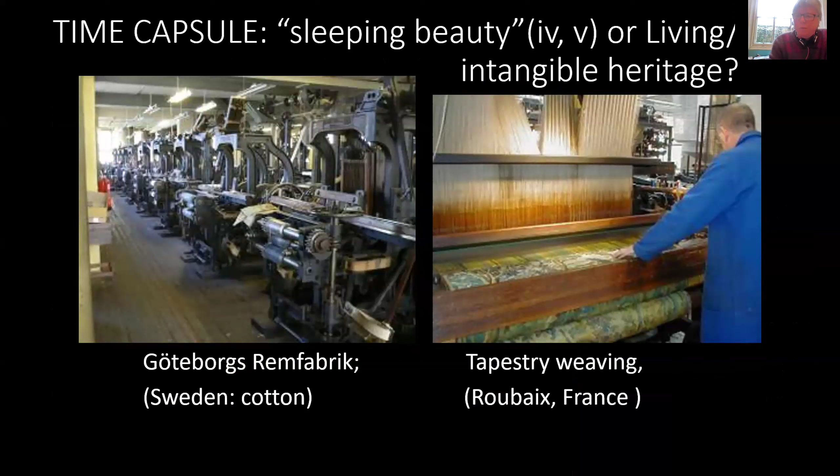And then we have urbanism, and a good example I was at just a couple of weeks ago is Żyrardów, which was founded by the Frenchman Philippe de Girard. Then it was owned by Austrians, but during the First World War it had to be pretended that the ownership was British, and maybe the shares and management too, in order to obtain compensation for the damage done by the Germans. So we're looking across the company town.

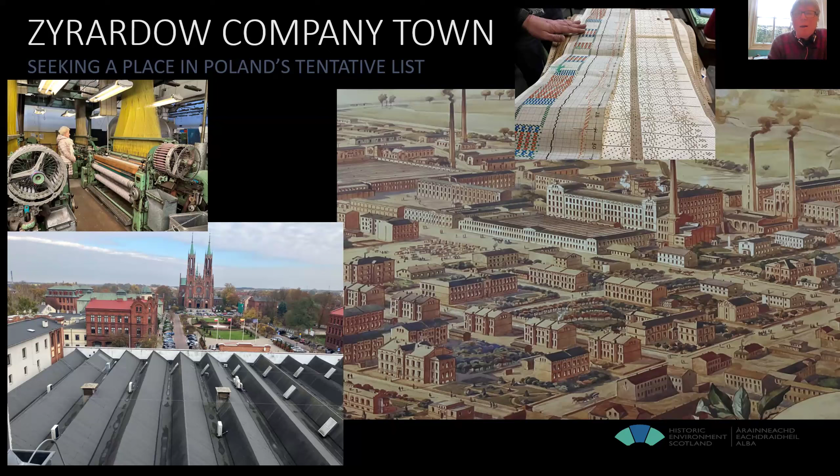Pretty much the whole town or city was created to support this linen industry. The museum there has got some looms going, and it's producing cloth, which when I was there then went into a fashion show - designers used the cloth made on these looms. So the industry is being kept alive, but as a museum process.

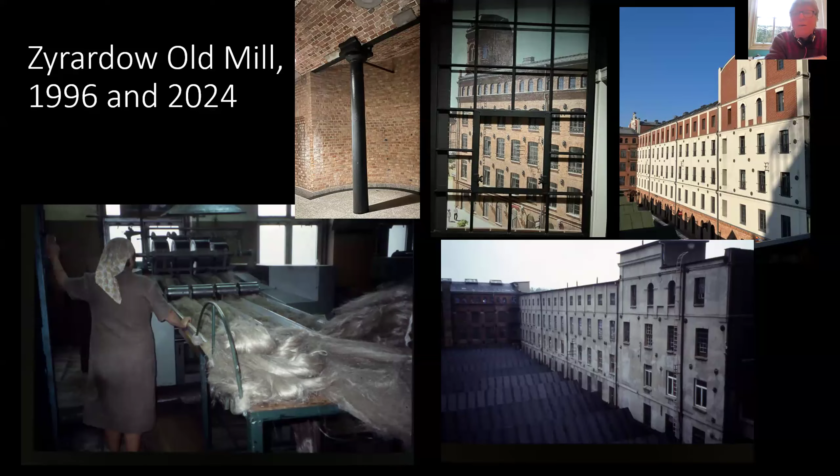When I first went to Żyrardów, it was still spinning flax - that's the photo bottom left. And then I stayed in the hotel that's been formed there, very cheap, in the old mill on the right. You can see there's been a restoration in the roof, and some of the old windows are hanging up in the corridors of the hotel.

And the company town has a lot of the attributes you'd look for, and some that you might not think of, like the hospital that's in the middle, the Resursa, which is a sort of hall for entertainments and activities, as well as housing. These interesting two-story outhouses containing the toilets, which you also find in Łódź. Some of these have been conserved, most of them have, and also a fire station.